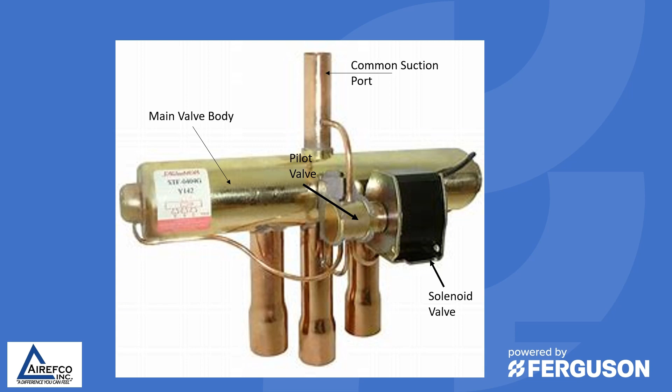So this is a typical reversing valve, or four-way valve, as they used to be called. It consists of a main valve body. It has a common suction port and then three other tubes which direct the refrigerant either to the outdoor coil or the indoor coil. It has a pilot valve and a solenoid valve.

So if you have taken the NATE certification test for heat pumps, you may have seen a question like this. What effect does a low charge have on the switchover operation of a reversing valve? A. Low charge only affects pilot valve operation, not main valve operation. B. If a reversing valve is oversized, transfer will be normal. C. Reversing valves are less likely to transfer if the charge is very low. Or D. Charge has no effect on reversing valve operation.

Many seasoned technicians who have been in the field for a long time have answered D, charge has no effect on reversing valve operation. The correct answer to this question is C. Reversing valves are less likely to transfer if the charge is very low.

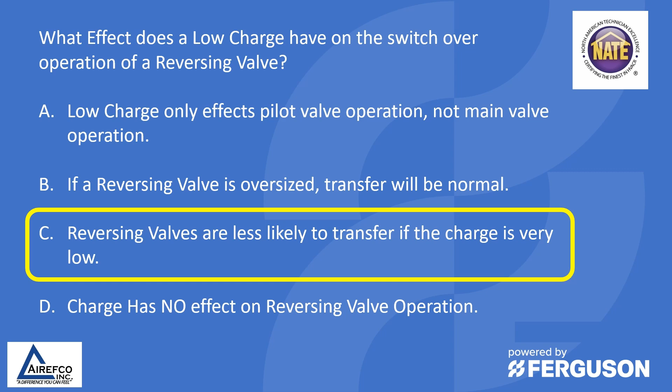So if you cut a reversing valve apart, you will see inside a slider and a trough that, when the slider goes back and forth, either directs the refrigerant flow from the discharge line of the compressor to the outdoor coil or to the indoor coil, depending on the mode of operation. Many technicians believe that the electric solenoid valve is what makes this slider move back and forth, when actually the pilot valve is actuated by the solenoid coil, and it directs the charge to one side or the other of the reversing valve to make the slider go from one side to the other.

So most reversing valves are energized in the cooling mode. You'll notice that in the cooling mode with the solenoid valve energized, the pilot valve has blocked off the discharge line, which is trapping the discharge gas on the left side of the reversing valve, causing the slider to move to the right. This then directs the high discharge gas from the compressor to the outdoor coil, which is in the cooling mode, rejecting heat to the outdoors, and the suction gas to flow to the indoor coil where we are absorbing heat.

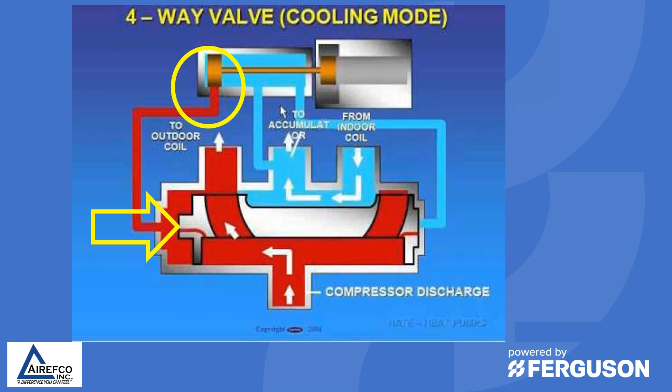So then when we de-energize the pilot valve, it then blocks off the other side of the reversing valve so that the discharge gas is now pressing against the right side of the slider, causing it to move to the left. This then directs the high discharge gas from the compressor to the indoor coil, which is now our condenser, where we are rejecting heat to the indoor, and it allows the suction gas to go to the outdoor coil, which then is absorbing heat from the outdoors to put inside.

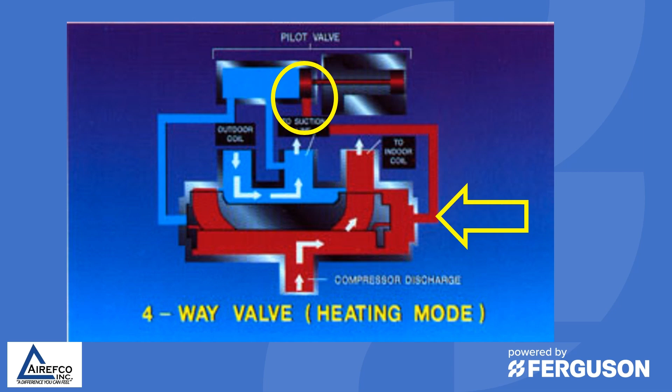There are four main types of failures in reversing valves. The reversing valve may fail switching from cooling to heating, or from heating to cooling. The valve may become stuck part way, causing gas to bleed from one side to the other, or it could be a refrigerant charge issue.

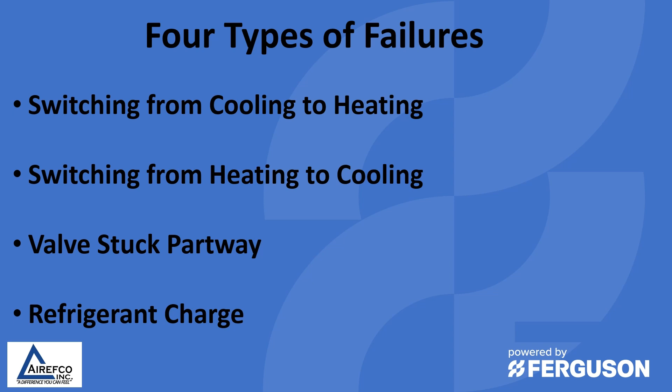The first thing you want to do is inspect the valve for physical damage. Never take a hammer to a reversing valve, as the valve body is very thin metal, and any kind of indentation or damage to the valve body could cause the slider inside not to slide. So the valve needs to be inspected to make sure that the tubes directing the pressure are not kinked or dented in any way, and that there's no physical damage on the main valve body, and also that the electrical solenoid coil is intact and is firmly mounted on the reversing valve.

Then check for electrical issues. Is the reversing valve solenoid being energized and de-energized? Are there loose wires, or is the board not sending the signal to the reversing valve? And then lastly, check for refrigerant charge. If the system does not have a sufficient charge to move the slider, this could be the problem: that there is a leak in the system and there is not sufficient charge in the system to move the reversing valve.

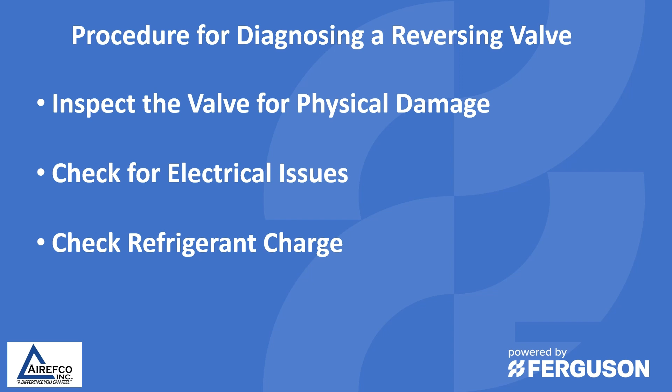One method for checking proper reversing valve operation is the touch test. You'll notice that on these diagrams they have divided the reversing valve tubes into TP1, TP2, TP3, and TP4. On the left side, this is the cooling or defrost mode, and TP2 and TP3 is the suction gas coming from the indoor coil. TP1 and TP4 is the high discharge line going to the outdoor coil. So TP1 and TP4 should be the same temperature, and TP2 and TP3 should be the same temperature.

On the right side, this is the heating mode with the solenoid de-energized. So now TP1 and TP2 become the discharge line, and TP3 and TP4 become the suction line. The gas goes very quickly through a reversing valve, so TP1 and TP2 on the right side should be the same temperature, and TP3 and TP4 should be the same temperature. By taking these readings on a reversing valve, you can determine if the valve is shifting properly and there's no bleed-by of hot gas into the suction line or vice versa.

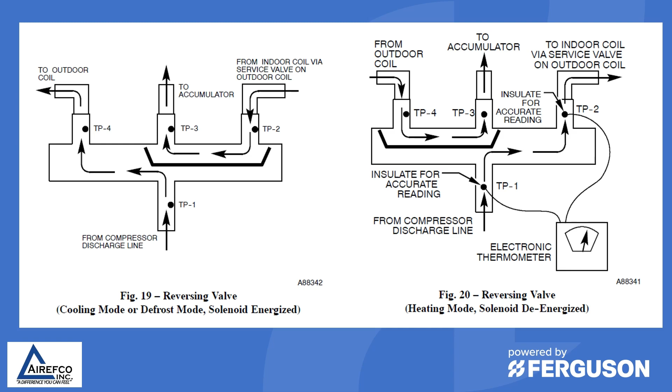Diagrams like this have been available for many years to help you properly troubleshoot a reversing valve problem. They take into consideration the cooling and heating and which tube is supposed to be hot or cold. So make sure when you're troubleshooting a reversing valve that you have a diagram like this available to you to aid in properly troubleshooting the reversing valve issue.

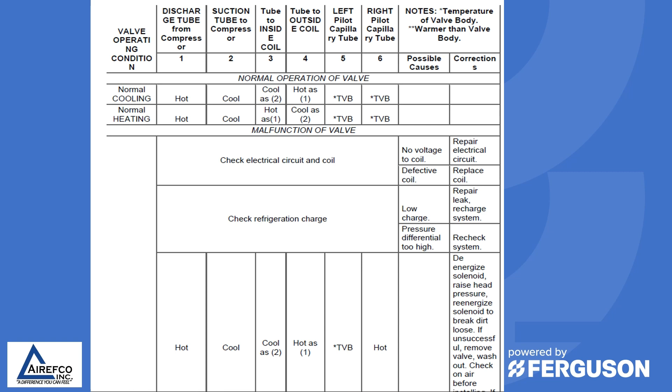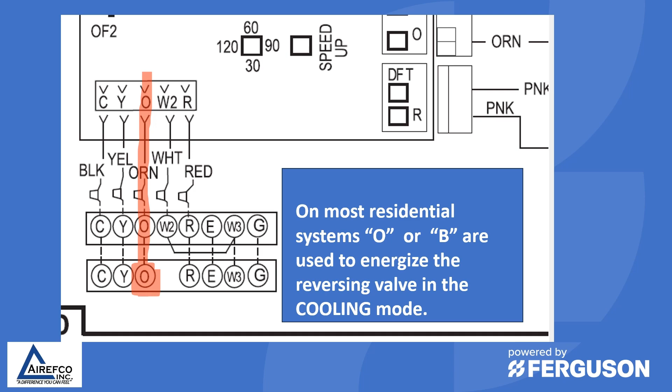On most residential systems, the O terminal or B terminal are used to energize the reversing valve in the cooling mode. A call that we get commonly in tech support is, on commercial rooftop units, where is the O or B terminal to land my reversing valve signal? Carrier commercial rooftops commonly do not have an O or B terminal. The reversing valve is energized through the cooling call internally in the control circuit.

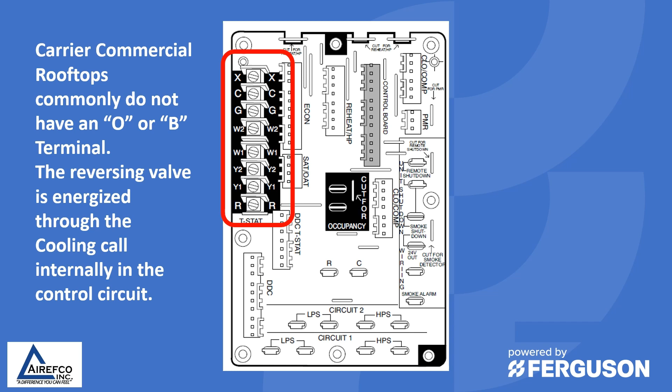So on a commercial rooftop unit, when we receive the signal for cooling on the thermostat terminal strip, internally the reversing valve is energized, so there is no O or B terminal. So on a Carrier commercial rooftop, you would set up the thermostat as a standard thermostat and not as a heat pump thermostat.